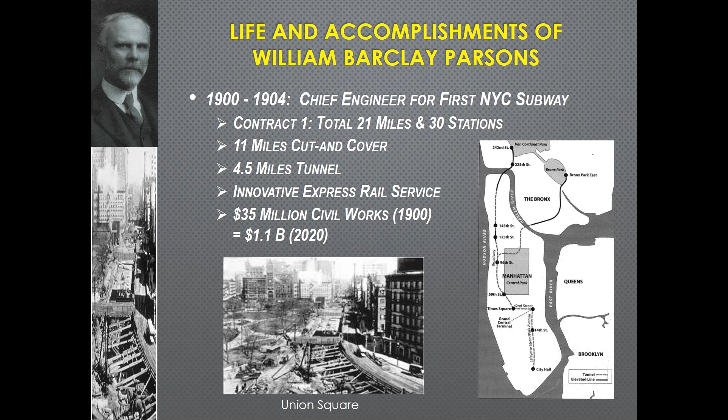After his assignment to the New York City subway, he was appointed by President Theodore Roosevelt to the Panama Canal Commission to study options for building that canal. He was also chief engineer of the Cape Cod Canal to expedite traffic between Boston and New York. And he also became trustee for the New York City Public Library and was elected as board chairman to Columbia University. So he had very many civic activities during that period.

When the U.S. joined World War I, Mr. Parsons volunteered in 1917 at the age of 58, and he eventually rose to the rank of colonel and commanded an engineering regiment in France. His U.S. unit was one of the first to arrive, and it was attached to the French Army, and was the first U.S. unit to be in combat in World War I.

Following the war, he was named Brigadier General of the U.S. Army, and he also became chairman of the board for the Columbia Presbyterian Medical Center and was instrumental in the building of that facility.

In his life, Mr. Parsons authored 4 interesting books. So these are not technical volumes, these are more historical volumes. I've had an opportunity to read a couple of them, and I found it especially interesting, the last one, Engineers and Engineering in the Renaissance. This was actually published after his death. If you can get a copy in a library or online, I highly recommend it. Very interesting to see how monumental structures were built in the old days before modern machinery and modern engineering technology.

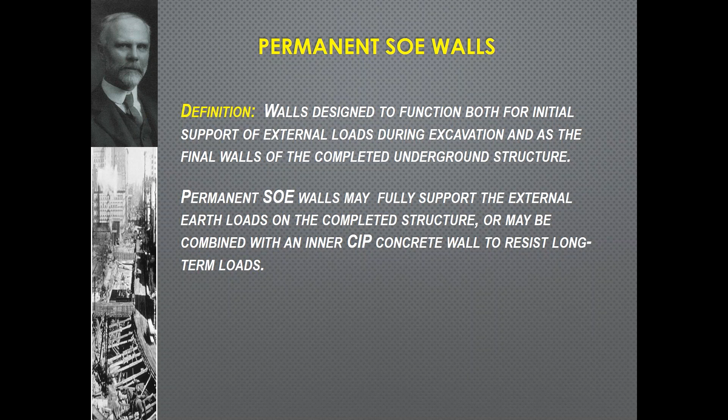I think we've had good experience with the use of permanent SOE walls. It's a mature technology, over 50 years of use. I remember one of my first projects was for a ventilation shaft for the Washington Metro system, and we used permanent slurry walls for that shaft. I thought it was a very economical way of constructing it.

It has a wide range of applications for highways, transit, buildings, and also water facilities. Major benefits: it obviously reduces the cost of construction, particularly if you can eliminate that cast-in-place inner structure. And it reduces the right-of-way, and this is all very important in constrained urban environments where we just don't have enough right-of-way to construct both temporary support of excavation as well as a separate permanent inner structure.

And with that is reduced construction time, and it's notable that it's very suitable to top-down construction. This is useful for buildings especially, because the building can be going up as you're excavating below ground for the underground elements of the structure.

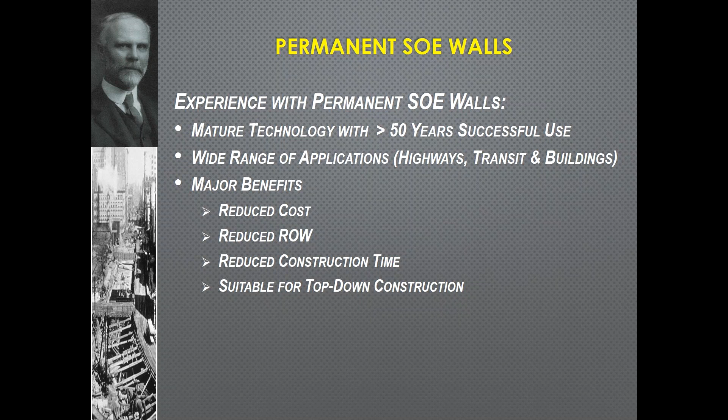One common type of permanent wall is concrete diaphragm wall, also called slurry walls. And when we put in soldier piles or steel piles, they're called SPTC walls, soldier pile and tremie concrete walls. On the Boston Central Artery, there was about 6 miles of slurry walls, totaling about 2.9 million square feet of walls.

Second Avenue subway, shown in the lower right, it was used as a permanent wall in phase 1, and it's being considered for phase 2. And for those who may not be aware, if you go to the 9/11 museum in downtown Manhattan, you can actually see some of the original slurry walls and foundations for the World Trade Center there. I highly recommend going there. It's truly a very moving experience and a moving tribute to the events of that day.

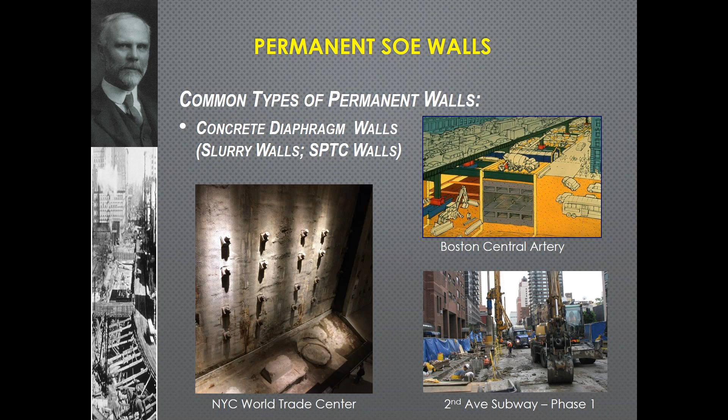And what are the advantages of slurry walls? Well, very high structural strength and very large wall stiffness, which is useful if we want to protect adjacent structures from damaging wall movements. In fact, sometimes that's identified as a key mitigation measure, is to have a stiffer wall system. In comparison to secant and tangent pile walls, they have fewer vertical joints and therefore less prone, theoretically, to seepage. One advantage too is easier connection of roof slabs and invert slabs to the wall than might be possible with secant or tangent pile walls.

Some of the disadvantages: it requires a larger area for the slurry plant and cage assembly. This could be a disadvantage in a crowded urban area. It requires more specialized equipment and construction methods than secant or tangent pile walls.

That's why in other parts of the country, slurry walls are used less, because it's easier to use local contractors that have bored pile experience for secant or tangent pile walls. And of course, there's risk of groundwater seepage into the structure, because many of these structures do not have a second interior structure for water tightness. I think this is one of the issues we have to address, because clients and engineers have second thoughts about using permanent slurry walls because of this issue.

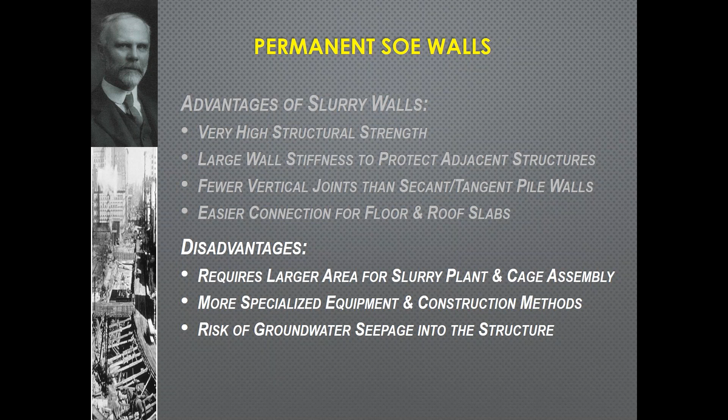Another type of permanent wall is secant or tangent pile wall. These could be reinforced either with steel sections, as you see in the upper right, or with a conventional rebar cage. They could be provided with different facings, either cast in place, shotcrete, or precast. In the lower right, the Cleveland LRT, they like the look of those piles, and you can see them today. I personally like them. I don't know if the public does, but I seem to.

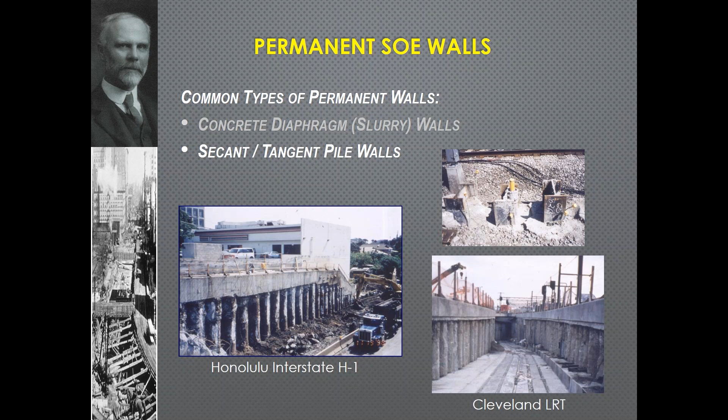Some of the advantages of secant and tangent pile walls: they have good structural strength and stiffness, which is good in many cases, so you don't need slurry walls. It uses conventional bored pile equipment and procedures, which is maybe more commonly available in other parts of the country. And it's well suited to constricted work sites.

In fact, even on 2nd Avenue subway, where they use slurry walls extensively, some of the ancillary facilities, because of the tight working areas, used secant piles instead. It's obviously more economical if you only have a small excavation, because you avoid the cost of mobilizing all the equipment associated with slurry walls.

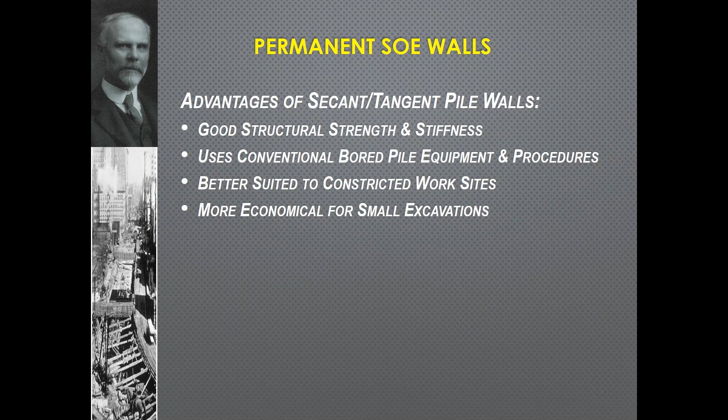Some of the disadvantages: if you need high strength and stiffness, it's not as good as a slurry wall. There's more vertical joints than slurry walls, so that could be a source of more seepage into the permanent structure. And as I said before, it's a little bit more difficult to make slab connections to secant pile or tangent pile walls.

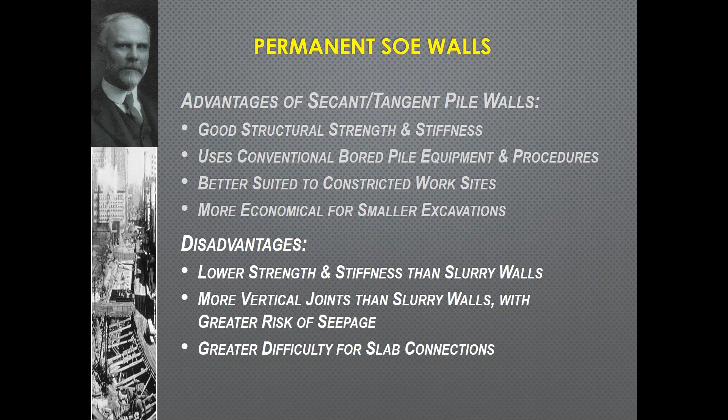Recently, a very innovative tangent pile wall design was used in San Francisco for the Muni subway, for the Union Square Market Street station. Here, they had a very narrow right-of-way along Market Street.

It was only about a 65 to 68-foot right-of-way, and they had to squeeze the station into that. Down at the station level, they had to have a wider area to accommodate the minimum width of the platform, as well as the TBM tunnels that pass through there. And at the surface, they had to have utility conduits on either side, and also keep the sidewalks in operation during construction.

So this led to an inclined tangent pile system. Inclined tangent piles were 4-foot diameter, installed with full-length temporary casing using a rotator type of equipment. After the piles were installed and the casing extracted, on the outside of the walls they used jet grouting to seal up any joints between those piles. It had a cast-in-place inner lining, and as I mentioned before, this inner lining was designed for water pressure, while the external tangent pile wall was used to support the ground loads.

The piles were installed at 9 to 10 degree inclination, with a tolerance of only 0.75%. At the tunnel levels, since the tunnels were installed first, they had only 4 inches theoretical clearance. It was a very innovative solution for the site conditions that were presented here.

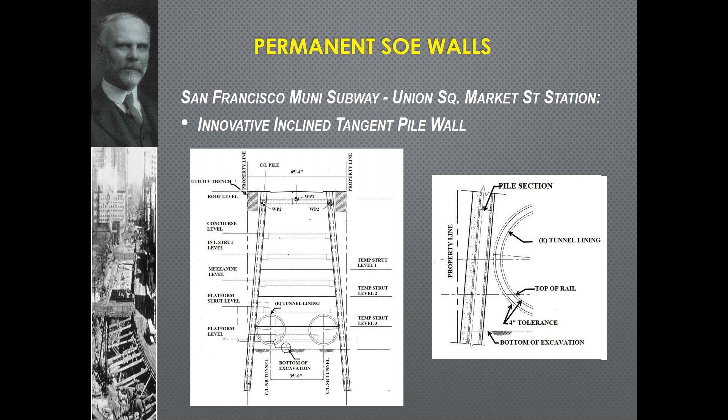On the right, you see Stockton Street and how narrow that right-of-way, that construction zone, was. And on the left, you can see the rotator equipment that was used to install and extract the temporary casing.

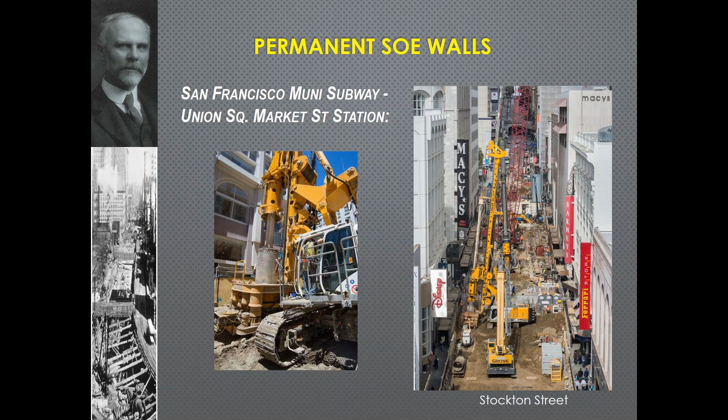In the upper right, you can see the tangent piles, and you can see the striations. They're basically vertical, which is evidence that when they extracted the casing, they just pulled it, they didn't have to use the rotator for extracting it. You can see in the lower right the permanent interior wall. Here, apparently the architects liked the undulating surface of the tangent piles, but they wanted a smoother finish, so they kind of mimicked the look of the walls with the cast-in-place concrete.

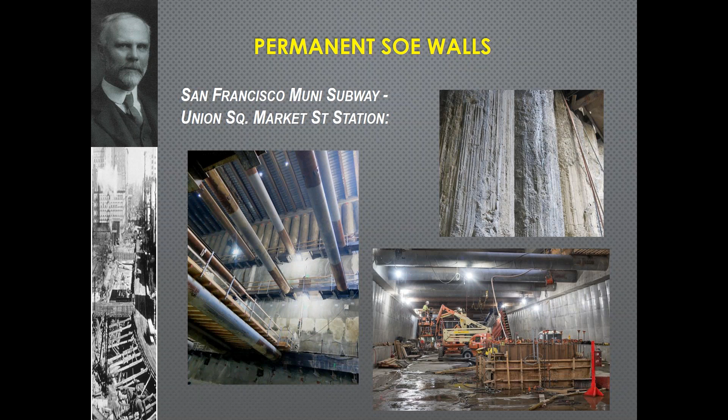Now, here's something that's maybe less common in the United States: the use of steel sheet piles for a permanent SOE system. It seems to be more common in Europe, but in Miami it's used for a number of structures for underground parking garages or building basements. It's curious because in Miami there's a limestone layer they have to drive the sheeting through, or in some cases they pre-excavate a trench, backfill it with granular material, and then drive the sheeting through that. After it's installed and exposed, the seams are welded for water tightness, the surface is sandblasted, and then coated with paint to provide corrosion resistance. So an innovative or different system that we don't often think about.

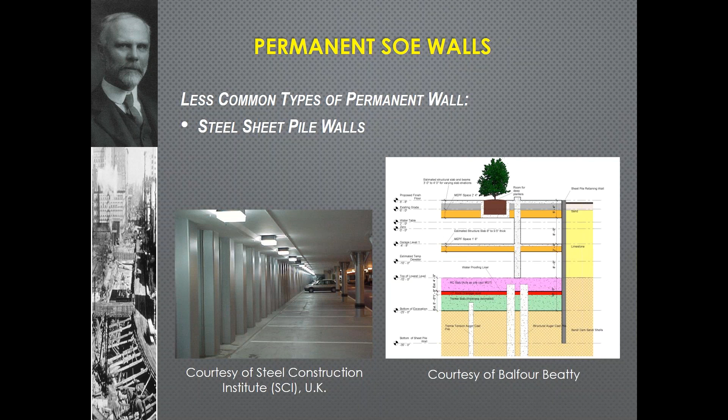So some final thoughts on the use of permanent SOE walls. They're a very economical option, and I think they should be considered for underground structures. Even now, they've been around for a while, but even now there's some innovation, finding new applications for permanent SOE walls, such as the wall in San Francisco.

I think the use of permanent SOE systems requires greater attention to design details and construction procedures, and seepage needs to be better controlled to achieve more consistent performance. I think these last two points are very important to designers and owners to make sure that the performance is as intended.

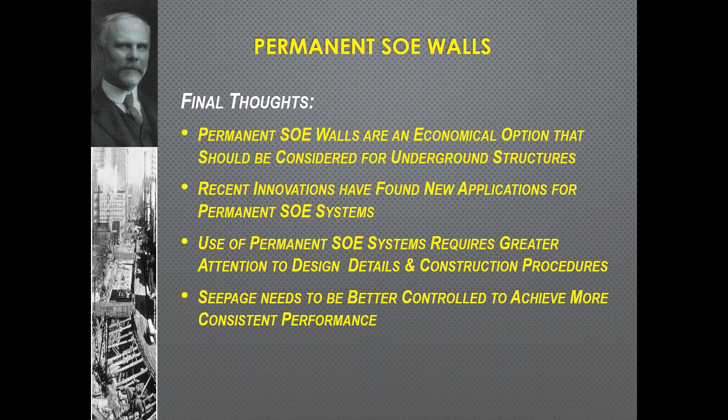And the next series of slides will talk about some of the design and construction considerations related to these walls.

A general observation is that I think the design procedures are well established and proven to be generally successful. Recently, in recent decades, we now have numerical analyses that provide a really powerful tool to analyze and design systems that would have been very difficult to do in years past, unless you were conservative. But it is a very powerful tool. It allows us to better understand soil structure interaction, to assess the impact of different construction staging, and also to better estimate ground and structure displacements.

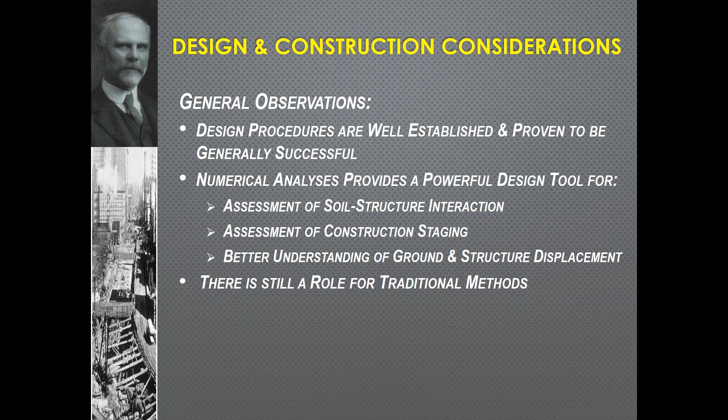But I think there's still a role for traditional methods. In particular, the use of the tributary area method with the apparent earth pressure diagram—I think we still need to check that, run through those calculations.

This approach was originally developed by Terzaghi and Peck on the Chicago subway system. I think it's got a long period of successful and proven use. It's typically conservative, and indirectly it reflects some of the typical variations that occur during construction.

During one lecture I had heard many years ago, the speaker was saying that numerical methods do a much better job of predicting bracing loads than the apparent earth pressure diagram. But I think the speaker missed the point. This method was not intended to try to predict the bracing loads, but to bracket or provide an envelope of maximum pressures that may occur due to different staging or different sequencing of construction. That's the real benefit of it.

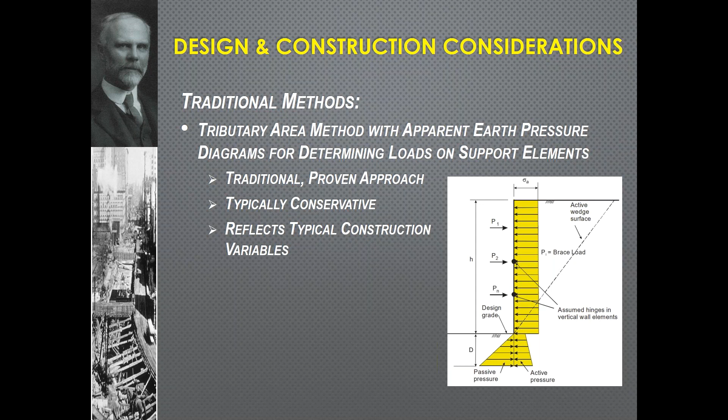I think today with numerical methods, we get numbers from the computer for ground displacements, but we've lost a feel for whether it makes sense.

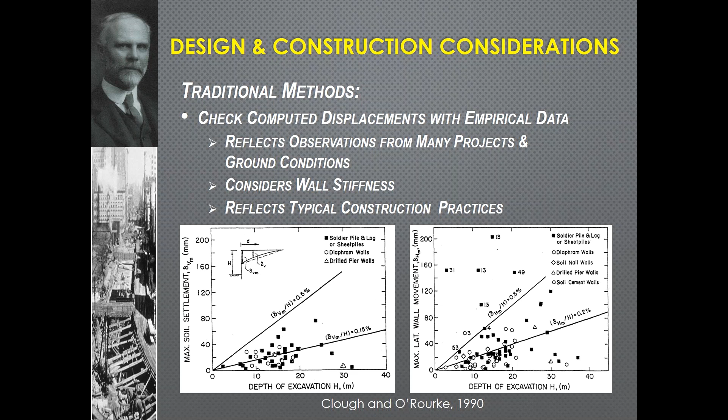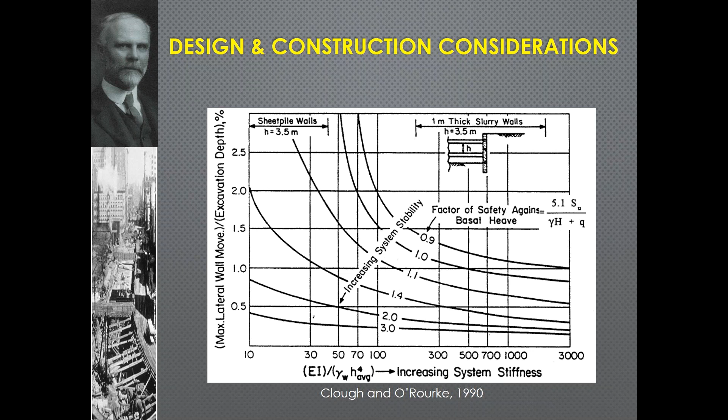Some of the design issues that need to be considered for slurry walls. First would be panel width. Typically they're in the 10 to 25 foot range. Whenever you're adjacent to structures that are sensitive to displacements, you probably should be looking at 10-foot long panels or maybe even less.

Construction tolerances is something I think designers need to give more attention to. A recent project had a problem with the blockout panels. They had a very tight tolerance on the location of those—the elevations were set within or less than a half inch. When they exposed those blockouts during the station excavation, they were off by some distance because of racking of the cage or for other reasons, and it required a lot of rework in order to make the connections of the slabs to that wall. So I think more realistic tolerances might have helped avoid those problems.

Another issue is rebar spacing. One of the problems with slurry walls is defects outside of the rebar cage due to many reasons, but one contributing factor might be that some of our rebars are too closely spaced and inhibit the flow of concrete through the bars. I think some of the guidelines in the FHWA drilled shaft manual are directly applicable and should be considered when designing rebar for slurry walls. There, it's recommended that the clear spacing between bars should be not less than 5 times the size of the maximum size aggregate, or preferably not less than 5 inches.

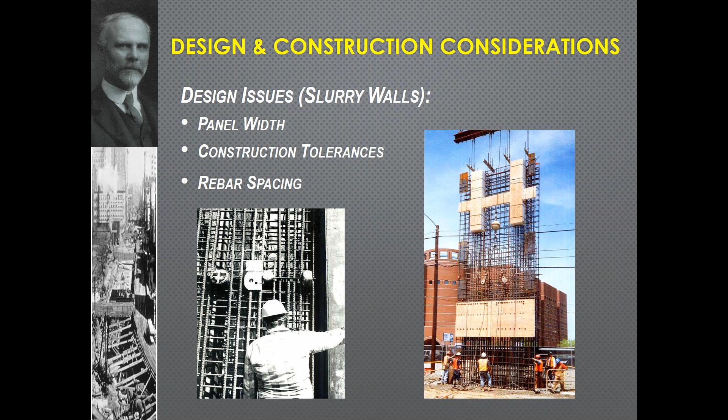Seepage, as I mentioned before, is one of the concerns with slurry walls. One recurring problem that we've seen on a number of projects is the leaking at the connection of the roof slab to the slurry wall itself. This could be the subject of a whole seminar by itself, and we have to engage structural engineers and materials engineers. But this is a problem that I think is fixable, we just have to give more attention to those kind of details.

In the end, with any SOE, permanent SOE wall that doesn't have an interior cast-in-place structure, we have to expect some amount of leaks, and we have to design for those leaks. Part of that is to provide access to those surfaces during the life of the structure, so you can inspect them and maybe do some grouting to remediate any leaks.

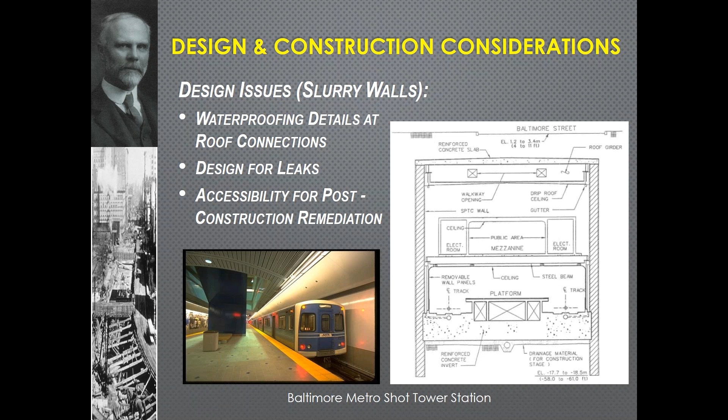Some of the construction issues related to slurry walls: in recent years, the use of polymer slurry has become very popular, and for good reasons. It's a lot easier to clean the slurry, and easier to dispose of when you're done with it than in comparison with bentonite. However, we have to recognize that there are many different polymer products out on the market, and they all perform somewhat differently. On the Boston Central Artery, which was ideal conditions for polymer slurry because you had basically the Boston blue clay, a cohesive material, even there they had to experiment with different polymers in order to get one that performed acceptably.

Polymers may not be suited to systems that have mechanical agitation, such as hydromills, because the hydromill breaks up the polymer fibers and thereby reduces its beneficial effect. I would really not recommend using polymer slurry when you have coarse-grained soils. Bentonite works much better—it has a higher unit weight, and it forms a filter cake on the sides of the trench to stabilize the hole.

On the Second Avenue Subway, they had one section of slurry walls installed using a polymer slurry, and over that section they had an average concrete overrun of 20%, indicating collapse or instability of the trench. They also had surface settlement outside of the slurry wall as much as 3 inches. When they excavated the station, they had a lot of chipping to do to cut back that excess concrete to the design line. So I would caution using polymer slurry when you have granular materials, and would actually recommend using bentonite slurry for such cases.

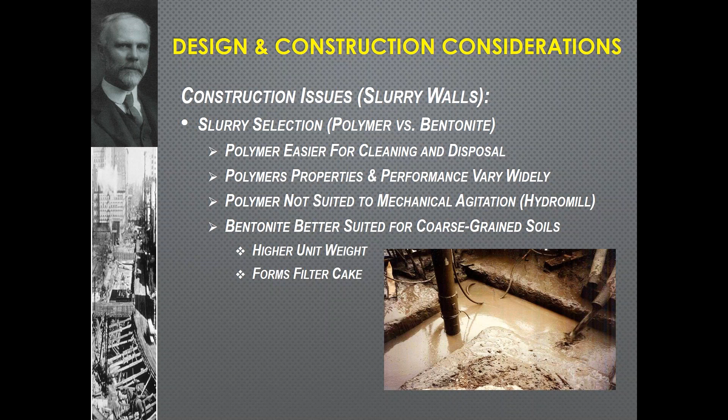Cleaning is extremely important with slurry walls—bottom cleaning, and also cleaning the slurry before you start concrete placement. Any sediments left sitting on the bottom mean you don't have as tight a contact, and you might have excess or increased seepage from the bottom. There's also the risk that sediment in the slurry could be trapped within the wall panel and form a source of seepage.

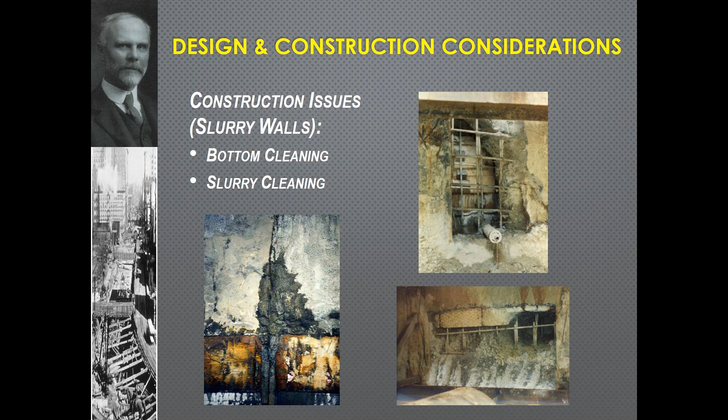Concrete mix is also important for slurry walls. Typically, it's recommended that concrete be provided with a slump of 7 to 9 inches, and it has to maintain a certain minimum slump—typically 4 inches—during the duration of the concrete placement. Aggregate size should also be limited. I've seen cases where aggregate of 1 inch to 1.5 inch was used, but that just increases the risk of problems in the flow of concrete through the rebar cage.

So it's better to go with a smaller size aggregate, especially if you have a large concentration of rebar. We would recommend no more than 3/4 inch.

Now there's a technology being rapidly adopted with drilled shafts, and that's the use of self-consolidating concrete. Here, the concrete is so fluid that you can't even measure a slump—it's meaningless. So they do the QC measurements by determining the spread of the concrete, typically looking for a spread of at least 18 inches after you lift the cone. I think this is promising for slurry walls.

I think this promises to reduce some of the defects we see in the trapping of contaminants or poor concrete outside of the rebar cage. So I'd like to see some examples of that in the future. I think it should go a long way to solving some of those problems.

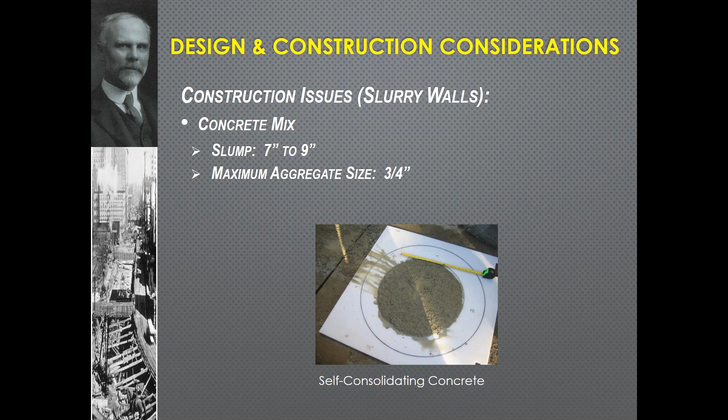With concrete placement, the number of tremie pipes should be considered. If you have a long panel, one pipe is just not enough, because the further the concrete has to flow laterally, the more debris it accumulates, and wherever that debris is trapped, there's a greater concentration of debris. So I'd suggest any panels greater than certainly 16 feet, if not 12 or 14 feet, should have at least 2 tremie pipes.

Now, if you have multiple tremies, you have to coordinate the concrete placement in those tremies. The concrete has to rise uniformly, otherwise you risk trapping laitance in some of the concrete if the concrete from one tremie starts pouring over the concrete from the other.

With any tremie operation, it's essential that the tremie maintain a minimum embedment into the concrete—at least 5 feet. And of course, you have to avoid interruptions to the concrete pour, because as the pour is interrupted, the concrete starts setting. It's not as flowable, and it's likely you'll get cold joints or defects in the panel.

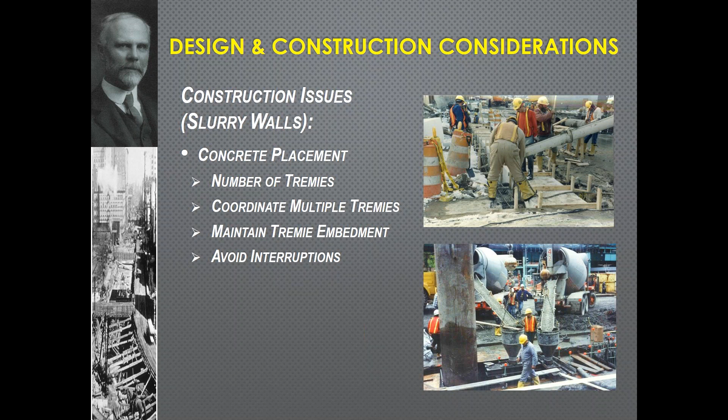Some of the construction issues related to secant and tangent pile walls: number one, you have to maintain proper pile position and alignment. That's essential to minimize the risk of gaps between the piles that may be a source of ground loss or seepage. Many of the other bullets here are essentially the same as what you'd encounter with drilled shaft construction.

You should be using temporary casing in granular soils. You have to maintain the fluid level within the hole during drilling, so you don't get seepage and loosening of the material under the casing. And you have to clean the drilling fluid prior to concrete placement, again, to avoid contamination of the concrete.

You have to provide sufficient rebar spacing, as I mentioned before, and have proper concrete mix and placement methods. I would suggest referring to the FHWA drilled shaft manual for what I think are best practices for bored pile construction.

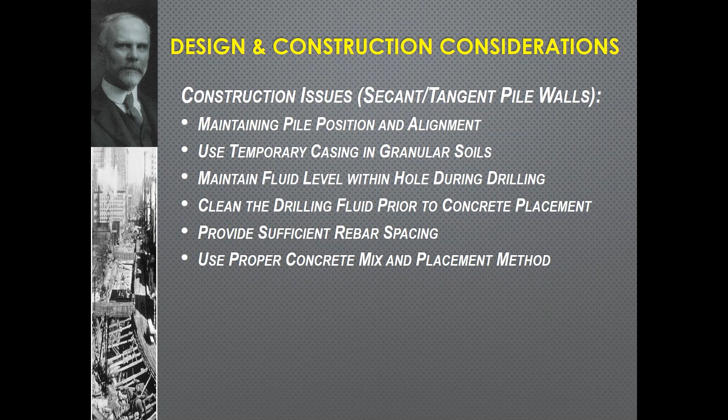Some final thoughts on design and construction. Design methods, I think, are well established and generally successful. Numerical analysis provides a powerful tool, especially for estimating ground and structure displacements. But there's still a role for traditional design methods and empirical data, and I think it's very useful to refer back to that as a sanity check and as a check of the more complex results from the more complex analysis.

I think construction means and methods need to be suited to ground conditions. One type of method or construction may not work in all ground conditions. Better construction practices can improve the performance of these structures, and I think it is essential that we continuously improve our construction practices, because if we want owners and engineers to be comfortable selecting permanent SOE systems, we have to assure long-term performance.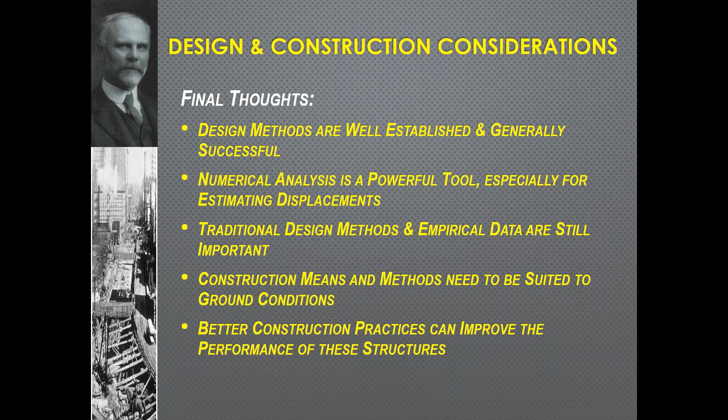That leads to the next part of the presentation, a discussion and some thoughts on the performance of SOE systems. I think the performance is generally good, but some problems still occur. Fortunately, we don't have catastrophic failures very often.

Here's an example of one back in 2004 in Singapore. Cut and cover construction with slurry walls that completely collapsed. The forensic studies found a basic problem, and it was a design problem on this project. The designer used the drained strengths for the adjacent soil, even though those soils consisted of 25 meters of soft clay. If they had used the undrained strength, they would have found that the lateral loads were significantly greater than what they estimated with the drained strength. Complicating the problem was inadequate stiffeners for the walers, and there were some field changes to the strut-wale connection, which made things even worse. So this, I think, is a problem with design, and to some extent added to by construction changes.

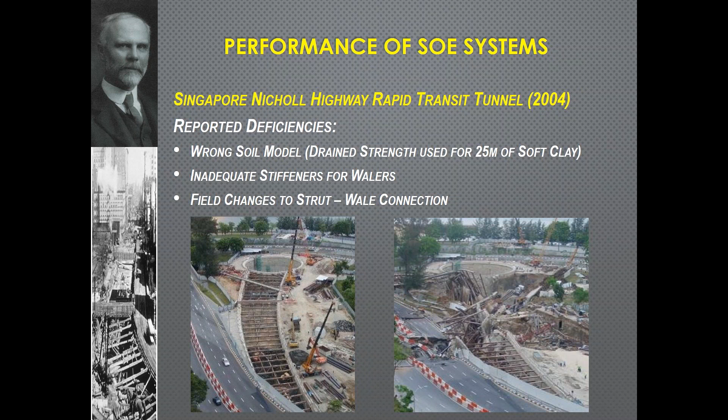Here's a failure of a tied-back wall in Istanbul fairly recently. The photo on the left shows the wall just before failure, and the one on the right shows the wall in the process of total collapse. It's obvious that either the design earth pressures were too small, or the anchors were not properly designed, or maybe there were problems with the installation and achieving the capacity of those anchors. I haven't seen a report of this particular failure, but I'm showing this just to illustrate that such catastrophic failures can occur, but fortunately they're not too common.

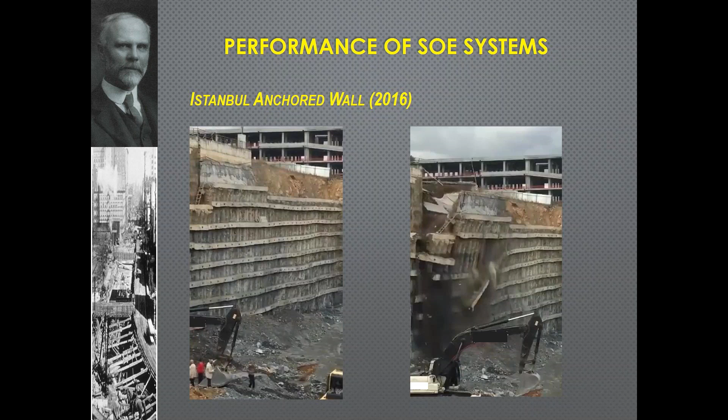This is a different type of problem, different type of structure. This is a sinking caisson that was used for a water treatment plant shaft in southern Michigan. This facility was constructed by casting rings at the ground surface and then adding rings sequentially as the structure sank into the ground. This particular photo shows a shaft that's 70 feet in diameter and has 4.5 foot thick walls, and it had to be sunk through about 40 feet of soft, cohesive soils.

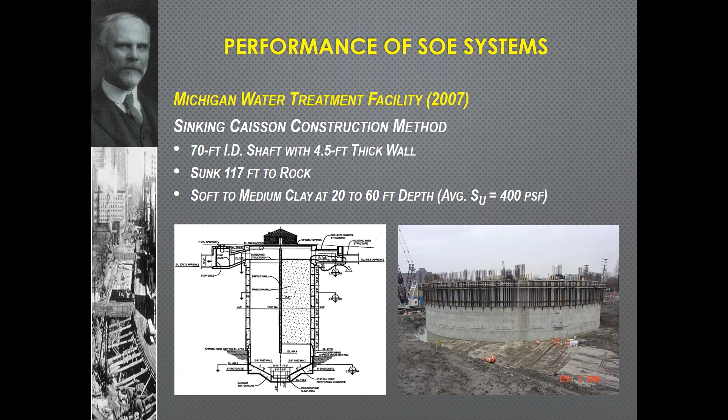Now, if they had fully excavated the inside of the caisson, they would have had instability of the base, but the designers anticipated that and designed it during construction with a soil plug to maintain stability. However, during construction, when the caisson was being sunk, it ran into some obstructions, and it forced the contractor to remove the plug on the inside of the caisson to expose and remove those obstructions. But by doing so, they removed the interior overburden pressure.

And that caused, as you see here, what we often hear about as clay squeezing like toothpaste. This is one case where it was actually observed. The soft clays were so stressed that they just squeezed into the caisson, resulting in large displacement and settlement outside of the caisson, and tilting and structural damage of the caisson. And it's curious that, again, the stability number, a very simple calculation, should have warned that this was going to happen.

The stability number equation here is just a very simple thing: it's the external overburden pressure plus any external surcharge pressure, minus the weight of the plug within the caisson, divided by the shear strength of the soil. Very simple calculation. I've always recommended that on any project, whether it's a retaining wall, slope, or caisson such as this, run that simple calculation. That should give you a good idea if you have a problem or if everything is fine.

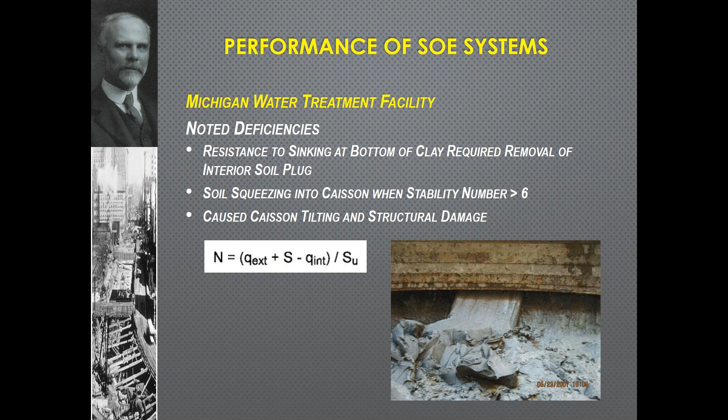Fortunately, we don't have too many catastrophic failures, but more common types of problems are related to ground loss and settlement, and there's a whole host of causes for these things. I think everyone on the call is probably familiar with these, but there's possibly one cause that isn't often recognized, and that would be ground loss due to the wall installation itself.

As I said before, oftentimes we select a stiff wall system. We feel that's a mitigation against ground and structure movements. But sometimes we can have significant displacements due to the installation process itself. We can't just wish those walls into place.

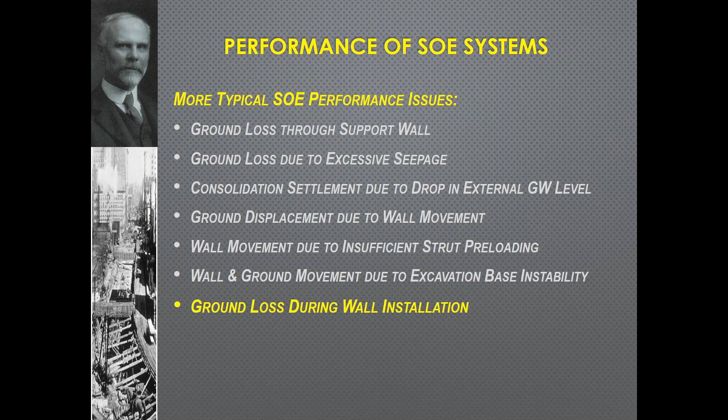Here's an example of a fan shaft that was supported by secant pile walls. The secant piles, 39-inch diameter, and the excavation was about 30 feet deep. The system was used to support a masonry structure that was adjacent to the excavation. The structure was founded on shallow foundations and underlain by fill, sand, and silts, and it had a high groundwater table.

A large amount of settlement occurred during the installation of the secant piles, about 1.5 inches, which far exceeded the specified limit of 0.6 inches. I think part of this was due to the difficult ground conditions, but inspection records also indicated that there were some problems with the installation of the piles.

Sometimes they didn't maintain a sufficient plug within the casing, and sometimes actually they drilled below the casing. Often, they let the water level within the casing drop below the groundwater level. I think all of these contributed to ground loss into the casing and therefore settlement outside of the casing.

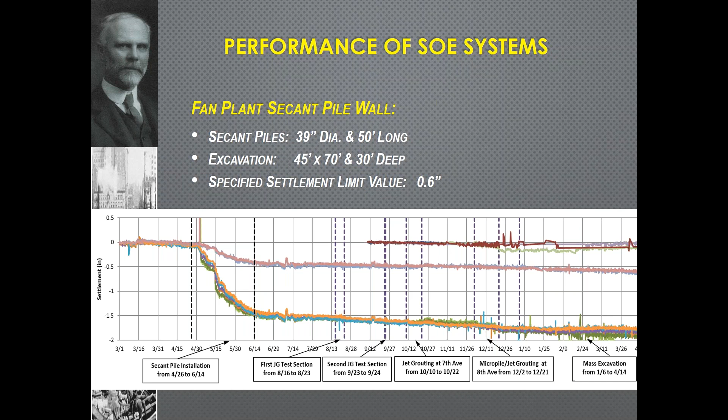I think on many projects, we try to apply the observational method, and certainly in more difficult projects, it's essential that we use this method. A method developed by, proposed by Ralph Peck many years ago. And this requires several steps.

One, you have to predict the performance of the structure. You have to estimate threshold values, what would be acceptable amounts of movement. You have to monitor the performance to see how much movement that you actually get. I think we all do a good job on those first three bullets, but I think sometimes we miss the next few bullets, which is an essential part of the observational method. And that is to define contingency measures and have these measures available when needed or if needed during construction.

Not too long ago, I saw a submittal that said, well, we're going to protect the building from settlement because we're doing instrumentation monitoring. That's not correct. You do the instrumentation monitoring to give you the information, but you have to have a practical contingency plan ready to implement. One project, Aaron had mentioned the Eurasia Tunnel that I worked on.

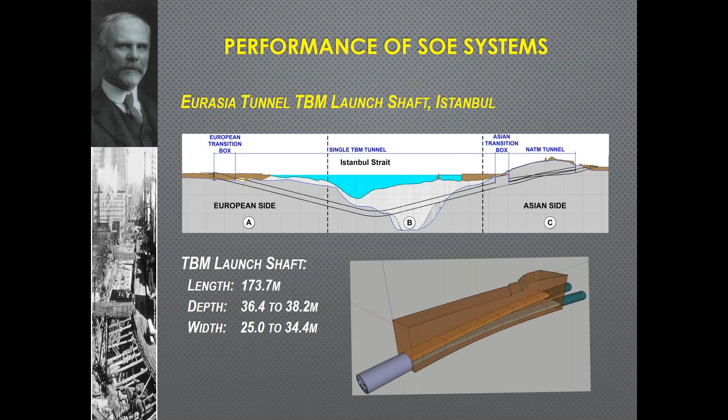On the bottom is a graphic representation of the quality of the rock along one side of the excavation. Just by the color coding, I'm not getting into details, but you can see how highly variable the quality of the rock was. So it was impossible to come up with an idealized profile or design parameters.

For this project, the designers looked at other excavation experience in Istanbul and looked at the literature and came up with what they felt was reasonably conservative parameters. The contractor thought that they were too conservative and brought in his own consultant who had more optimistic ideas of the parameters. In the end, to move the project along, it was a compromise on the parameters, but it was decided to place a lot of emphasis on monitoring and also have the contingency plan available.

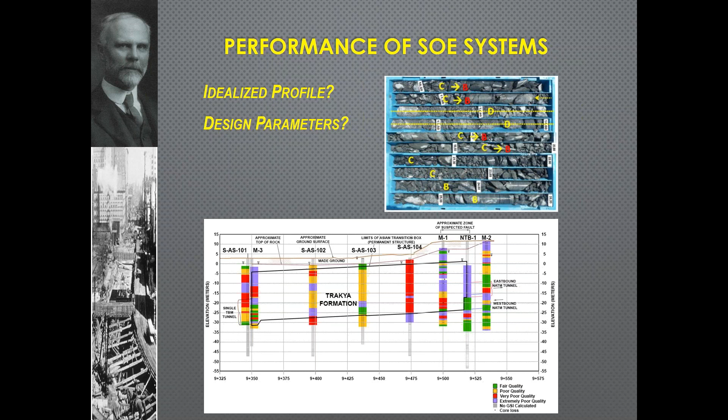The displacements were estimated using Plaxis, and the maximum wall displacements were estimated to be about 15 millimeters, not very much. By the way, in the cross section, the upper portion is a secant pile wall. That continuous wall was selected because that's where we expected the greatest seepage or groundwater problem. Below that was individual soldier piles, 8.8 meters, spaced 1 meter apart.

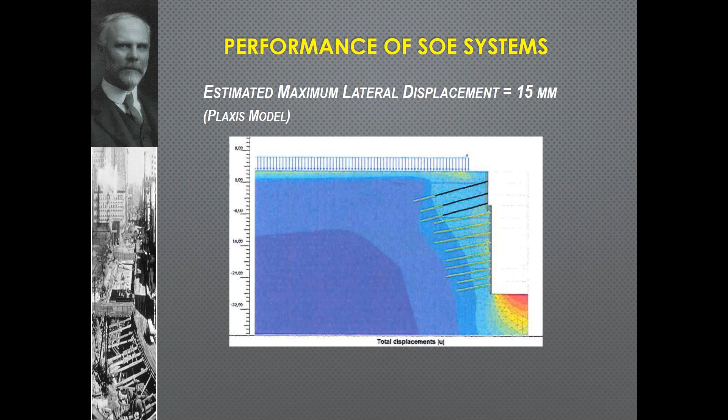Now, during construction, they were down about 12 meters, about one third of the total depth of the excavation. They experienced displacements that jumped overnight up to about 35 millimeters, which is twice what was estimated for the full depth of excavation. So at that point, the contingency plan kicked in. The contractor partially backfilled the excavation by putting in berms to stabilize the sidewalls.

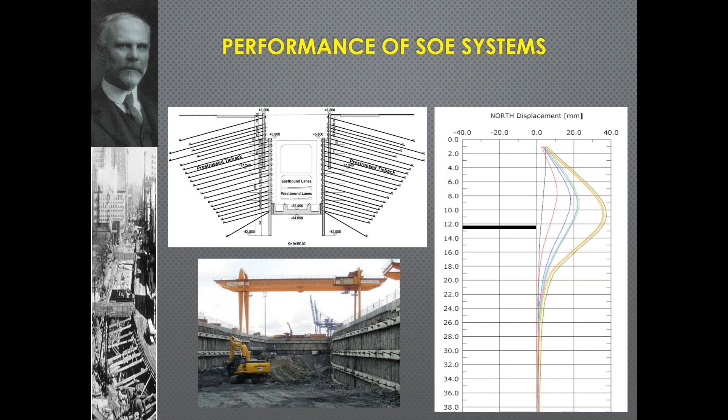The engineers analyzed the data, back calculated parameters for the rock, and then used those parameters to reevaluate the support system, and it resulted in 2 or 3 additional levels of tie-back anchors. After implementing that, the excavation was completed without further issues. As of today, it's all backfilled, and the roadway is in operation.

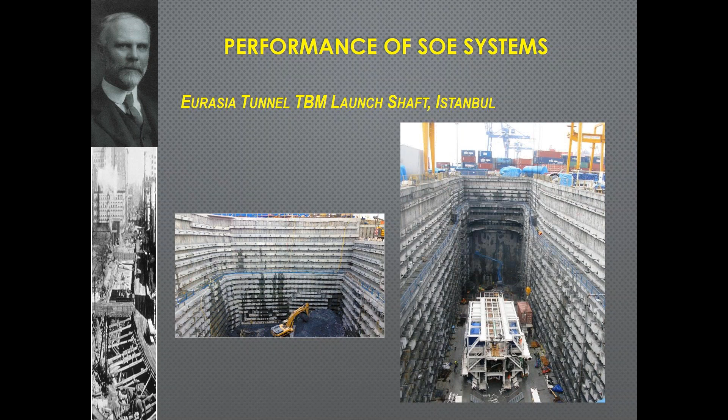Some final thoughts. Major failures, fortunately, are rare, but displacement problems persist. There's a need for greater attention to construction means and methods and construction inspection to do a better job in constructing our SOE systems. Instrumentation monitoring and timely response to issues are key to a successful project.

Now, the last portion of the presentation, I'll talk about the design for buoyancy of permanent underground structures. Today there are 3 strategies: either provide sufficient dead weight of the structure and overburden to resist the buoyancy, or provide a permanent pressure relief system under the structure to relieve the uplift pressures, or install a permanent tie-down system to make the invert slab sufficiently resistant to those uplift pressures.

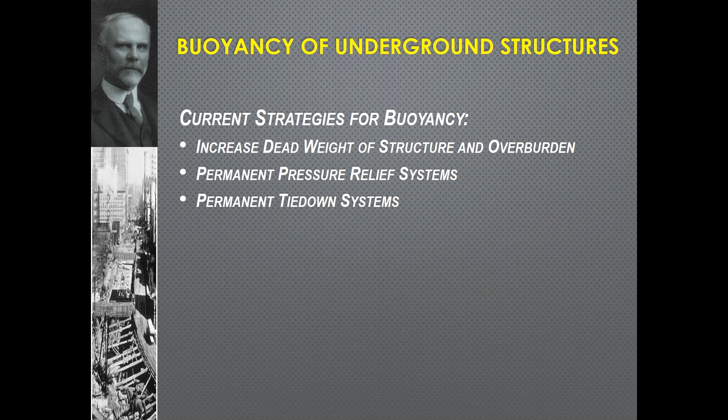Using dead weight is a traditional approach. It's the most reliable method, but it may also require some temporary pressure relief system during construction, until the box has enough weight and the overburden is sufficiently high that the weight can by itself resist the uplift pressure.

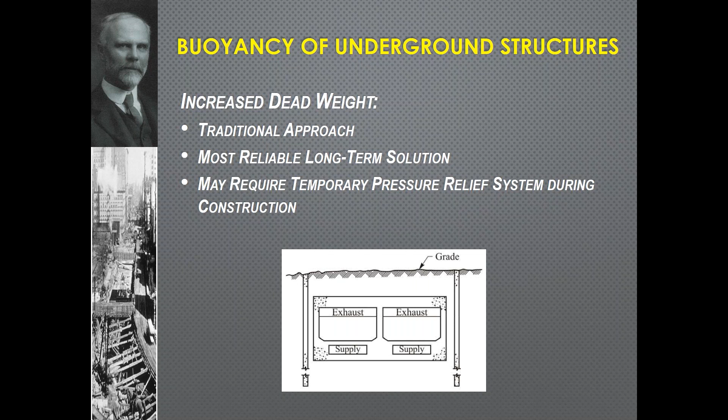A permanent pressure relief system has been used. We used it up in Boston for the Post Office Square garage. Here there was an above-ground, unsightly parking garage that was replaced with a 7-level underground parking garage. If we had to design or provide sufficient dead weight to resist the uplift force, there's no way they could have had 7 levels of parking.

But fortunately, in Boston, with the Boston blue clay and with the slurry walls, the perimeter slurry walls being extended into the underlying argillite, the seepage beneath the invert slab was low and controllable. So it was decided to go with a permanent pressure relief system. But these conditions were ideal for that application, and I'm not quite sure we'll see that in too many different locations, but here it worked very well.

In fact, in recent years, the system was converted to use whatever water was extracted to clean the garage, and therefore limit or reduce the amount of city water that would have to be used for the facility.

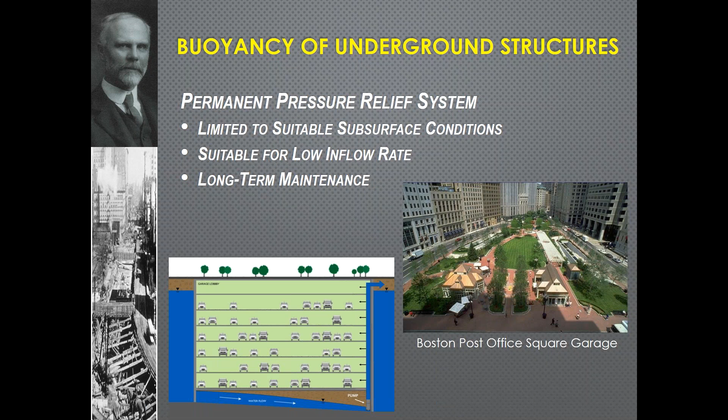The third method is a tie-down system. There's limited track record or experience with using such tie-downs in transportation structures. There's a project in Pittsburgh where it's been used, and there are a few examples in Europe, but importantly, they're all less than about 15 years old.

So there's not too much of a track record on the long-term experience with permanent tie-down systems. Now, they are used in some concrete dam retrofits, but regulations require that they're accessible and can be inspected and tested if need be.

That's kind of an inspection that we don't see in transportation structures. They're also used sometimes for water facilities such as shafts and pumping stations, but they're often only called into play when they have to unwater those structures. So that doesn't occur too often.

And if there were some damaging seepage or uplift of the slab, it's not a major problem as it would be for a transportation structure.

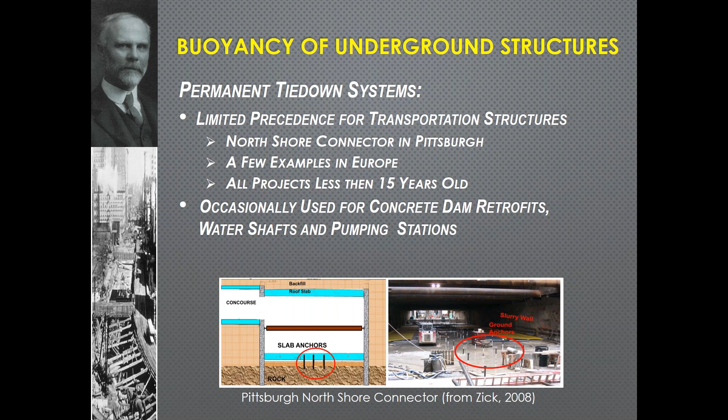What are some of the common types of tie-down elements? Well, we have drilled shafts, barrettes, which are basically just individual slurry wall elements that can be used for compression or tension loads, the use of mini piles, and also soil and rock anchors.

Some of the design issues that have to be considered for transportation structures, underground structures, typically it's 100 years or if not more. Look at the New York City subway system that's still operating, and it's well above 100 years. We have to think about load transfer.

If we have untensioned elements, those elements will experience elastic elongation as the load, water pressure comes onto the invert slab. So we have to estimate how much displacement that may cause.

Of course, corrosion is fundamental. We have to consider that, particularly for the entire length of the anchor, and especially at the connection at the top of the anchor. In some cases, we have to worry about creep, depending on the soil or the ground that the anchors are anchored in. And we have to think about monitoring and inspection during the service life of the structure.

And unfortunately, many of our transportation facilities, that's not reliably done.

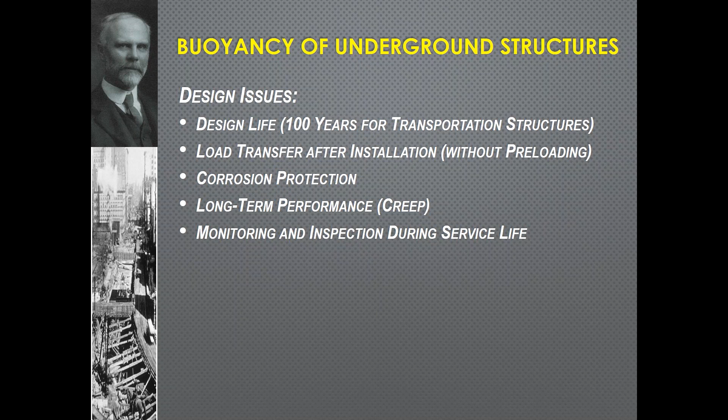Now, here's an example where we actually designed a tie-down system for a subway station in Baltimore for the Red Line. I have to say at the beginning that we fully designed it, it's ready to go, but because of funding and other considerations, it was not built, and I'm not quite sure when or if it will be built.

But in any event, it still serves as a good case history of a permanent tie-down system for an underground structure. We were forced to consider this because we had a very narrow right-of-way, but the box had to have certain dimensions. There was also a high water level, groundwater level, as well as a flood level above street level, so high buoyancy forces.

Looking at all those factors, it was not possible to provide sufficient dead weight, and we didn't think that long term it was practical to have a permanent pressure relief system underneath the invert slab.

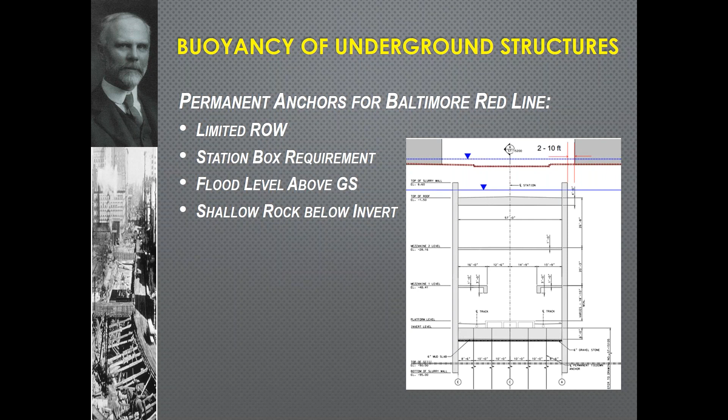But fortunately, rock was at a shallow depth below the station, and we took advantage of that in the design. Some of our recommendations for the Red Line: we limited the side resistance that we could count on from the slurry walls, because we were concerned that the slurry filter cake that builds up on the side walls would reduce that friction. So we were conservative in estimating that resistance.

We ended up using pre-stressed rock anchors tied down into the good quality rock under the station. Anchors were provided with double corrosion protection, with focus on the details of the anchor head to reduce the risk of corrosion at that location.

For a 100-year life, we reduced the AASHTO resistance factor from 0.5 to 0.4 to get greater reliability. And we provided additional anchors for redundancy, just in case some of the anchors failed. I think we ended up adding about 10% anchors to what we theoretically needed. And there was a requirement during construction, during installation, to test all of those anchors.

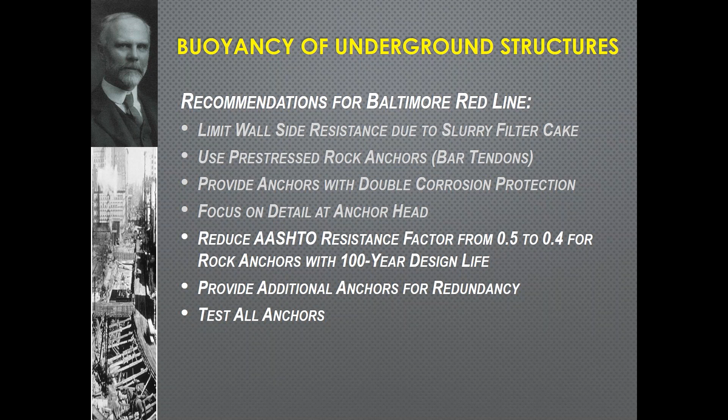So final thoughts on buoyancy and design for buoyancy. I highly recommend resisting buoyancy with dead weight whenever possible. Consider a permanent pressure relief system only if ground conditions are suitable. And if tie-downs are unavoidable, design conservatively.

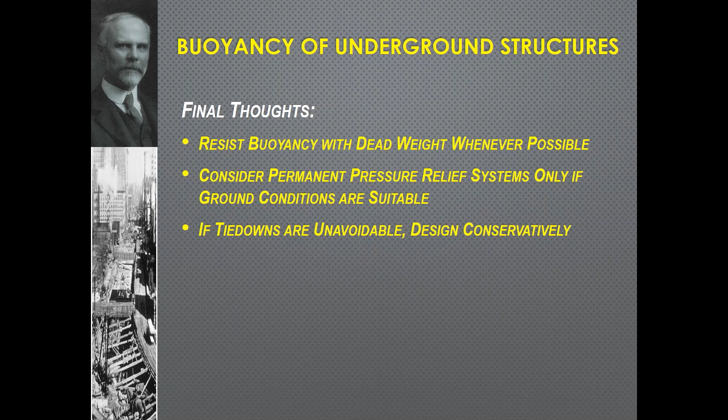So, to sum up the presentation, just a few key points. To reiterate, design methods for SOE are, I think, well established and generally successful. I think in the future, design needs to focus more on the details, constructability, and construction specifications.

The performance of SOE systems is generally good, but problems persist, especially with ground displacements and seepage, and I think those need to be addressed. Performance issues are often related to the means and methods of construction and the care taken during construction, and I think there's always room for improvement there.

Instrumentation, monitoring, and timely response to problems are key to a successful performance. And that concludes my presentation. I thank you very much

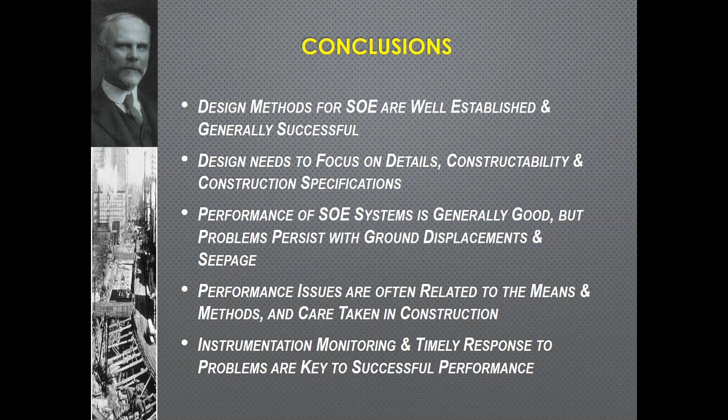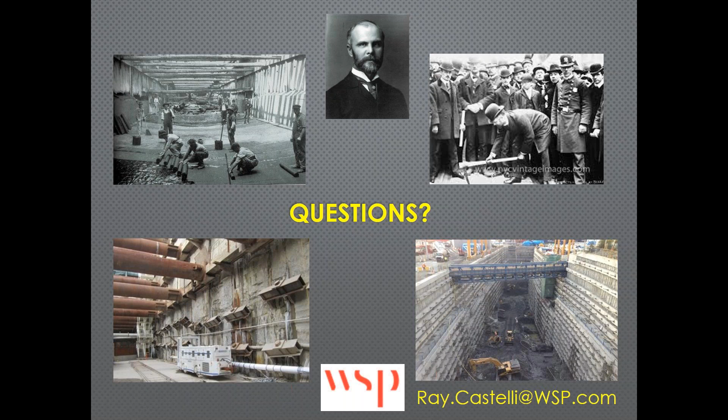I'm pretty sure that's the case because they also had the foundations exposed, but I can't say for certain on that.

The next question is, what are the typical maximums for secant pile walls and slurry walls? What is the deepest installation of each that you've seen in your experience?

I think 80 feet would be a typical maximum, although the tangent piles in San Francisco were over 100 feet deep, so it's achievable. There they had very tight tolerances on installation, so it is achievable but requires specialized equipment. They were monitoring those as they were going down with regard to inclination and position. So I think over 100 feet is possible, but recommended to stay within 80 feet if you can.

Okay, next question is, what are the options to solve buoyancy issues if you don't want to go with tie-down anchors and permanent pressure relief systems, if those two options aren't feasible? It doesn't leave you too many options.